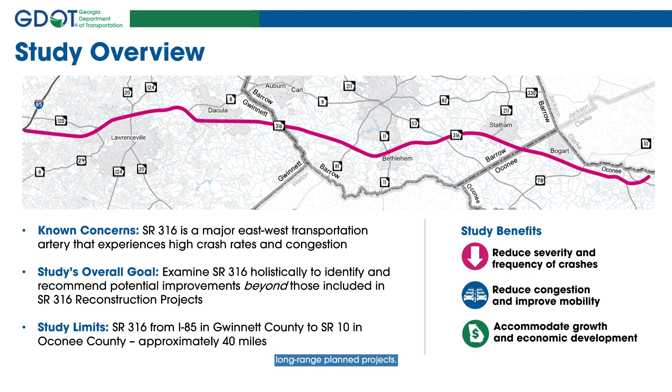The purpose of the State Route 316 planning study is not to duplicate the efforts of the reconstruction projects. Rather, the study is focusing on additional improvement needs along the corridor, with a particular focus on intermediate and long-range planned projects. The study began in mid-2022, and it is expected to conclude in the fall of 2024, although this schedule is subject to change.

As part of the study, GDOT is conducting an origin destination, or OD, analysis, analyzing existing and future traffic growth and land use data, and evaluating alternatives and providing recommendations. These recommendations will be detailed in the study's final report.

GDOT conducted its first phase of stakeholder and public outreach in the spring and summer of 2023. For stakeholders, GDOT conducted 4 virtual meetings with city, county, and business leaders, and 1 in-person meeting with a cross-section of community members. All told, we hosted more than 4 dozen stakeholders. For the general public, we conducted 3 in-person meetings in Gwinnett, Barrow, and Oconee counties. A total of 259 residents and 8 elected officials attended these meetings.

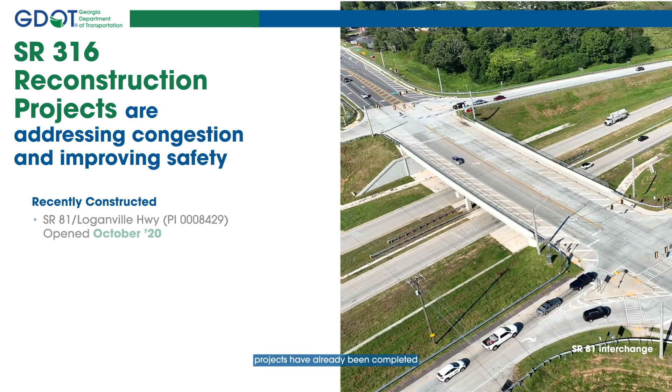As previously noted, the State Route 316 planning study is separate from, but concurrent with, a series of State Route 316 reconstruction projects. As this slide shows, several of these reconstruction projects have already been completed, at State Route 81 Loganville Highway, Harbins Road, and State Route 53 Hog Mountain Road. These projects are already easing congestion and improving safety along the corridor.

As an example, at the recently constructed State Route 81 Loganville Highway interchange, the speed during the PM or late afternoon hour has increased from 45 miles per hour in 2018 to 52 miles per hour in 2021. That means the overall flow of traffic has improved at this new interchange along State Route 316. In addition, we've seen a reduction in annual crashes from 106 in 2018 to 55 in 2021.

As this slide also shows, we have a project under construction at State Route 11, Christmas Avenue, near the town of Bethlehem, and we expect to see similar improvements once completed.

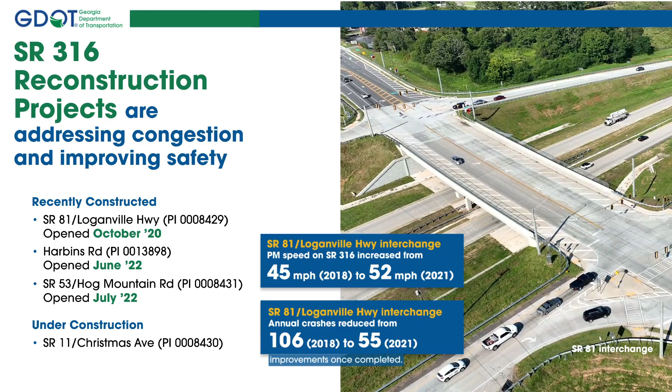As mentioned, the State Route 316 reconstruction projects aim to transform the corridor into more of a free-flow facility. Think of a free-flowing highway versus a roadway with traffic lights. $858 million is currently being invested within the corridor, a price tag that reflects a strong commitment to improve safety and mobility along State Route 316.

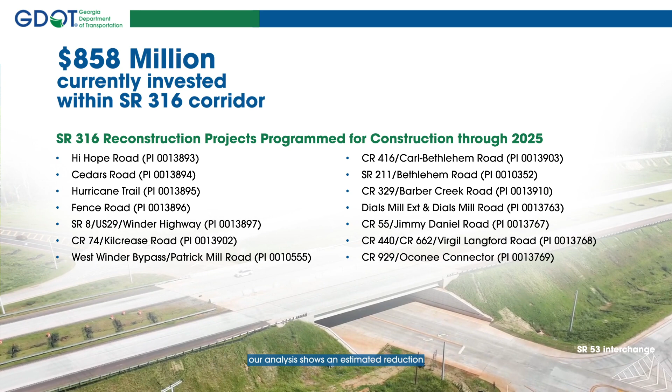Shown on your screen are the reconstruction projects that are programmed for construction through 2025. The word programmed means that the projects are funded and will start by that date. Once the reconstruction projects are completed, our analysis shows an estimated reduction of 212 crashes annually, or 11% in 2050.

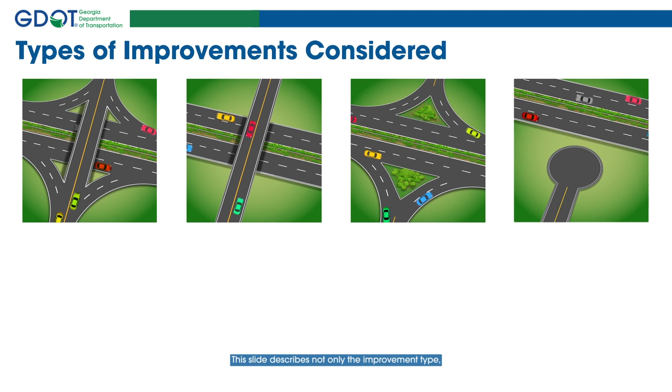Along the entire corridor, the study is considering 4 types of improvements along State Route 316 for the remaining at-grade access points. We shared these types of improvements with stakeholders and the public when we met in 2023. This slide describes not only the improvement type, but also the rationale for selecting an improvement type at a particular at-grade access point. Interchanges, for instance, should be considered in areas in which we see high traffic arterials and major development at a location.

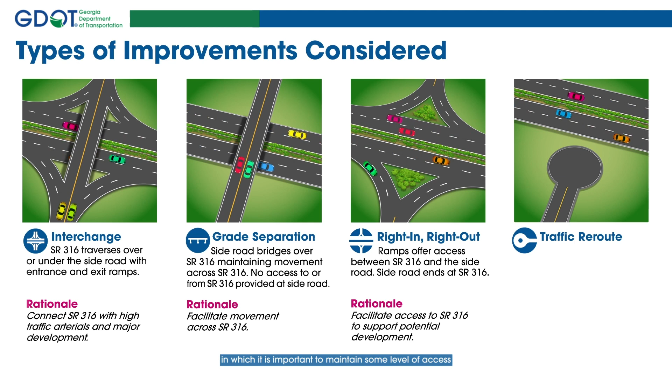Grade separations are appropriate in areas in which it is important to facilitate movement across State Route 316. Right in, right out access should be considered in areas in which it is important to maintain some level of access to and from State Route 316. For instance, access would be important to support potential economic development next to State Route 316.

Finally, traffic reroutes protect residential neighborhoods and low traffic rural areas from high-speed traffic on State Route 316. As State Route 316 transforms more into a free-flow facility, having uncontrolled intersections along State Route 316 to low-volume residential neighborhoods can create potentially unsafe conditions. Traffic reroutes will provide access to State Route 316 at other locations. Additional local road improvements may be necessary to facilitate a traffic reroute.

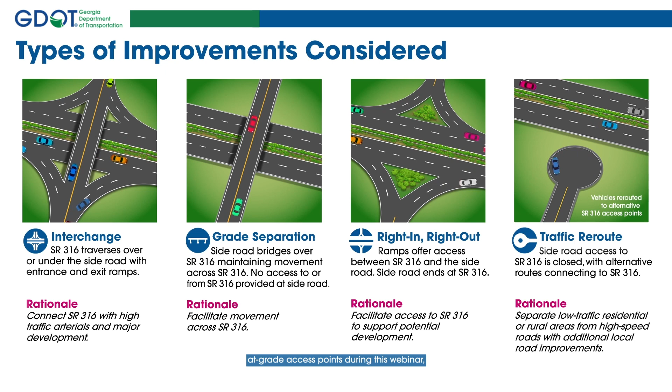Each type of improvement has trade-offs, including accessibility, property impacts, safety, and cost. As we share our potential findings for each of the remaining at-grade access points during this webinar, keep these trade-offs in mind. The current State Route 316 reconstruction projects address most of the existing high-traffic, high-congestion crossings.

In general, the remaining at-grade access points have lower traffic and connect more rural roads and residential neighborhoods. We believe the focus of these remaining crossings should be to complete the transition of State Route 316 into more of a free-flow facility. We should eliminate unsafe left turn movements to and from State Route 316 while maintaining some level of access to or across State Route 316 in areas in which future development is planned.

The rationales we discussed on the previous slide informed our selection of the recommended improvement types. Addressing the remaining at-grade access points is important. In addition, improvements to the arterials that cross and connect to State Route 316 are also important based on the study's analysis, as well as the feedback we received from stakeholders and the public.

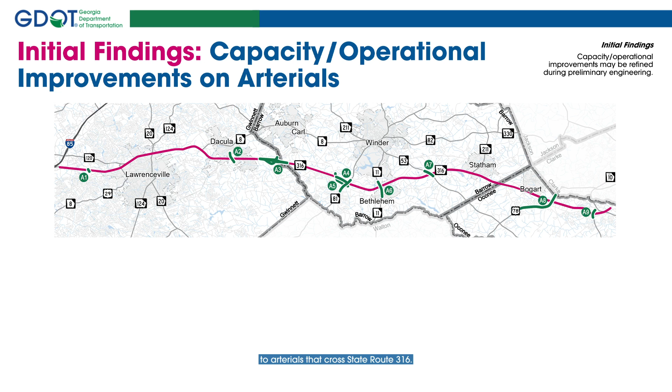Beyond addressing the remaining at-grade access points on State Route 316, the study's analysis, combined with stakeholder and public feedback, shows that additional improvements are needed to arterials that cross State Route 316. We have identified 9 potential improvements that would add capacity and improve traffic operations on several arterials. The improvements consist of road widening, intersection improvements, and one additional interchange at State Route 316.

The additional interchange is proposed at the Rowen development site. This interchange is in addition to the interchange at Williams Farm Drive. The second interchange at Rowen is dependent on the site reaching full build-out.

These projects were identified by pinpointing crossing arterials and intersections operating at level of service F even after implementing the access point improvements. Level of service, or LOS, measures traffic and operational conditions of a roadway and is designated with a letter from A to F. Level of service A represents the best conditions, and F represents the worst. The proposed projects would improve the level of service at these locations.

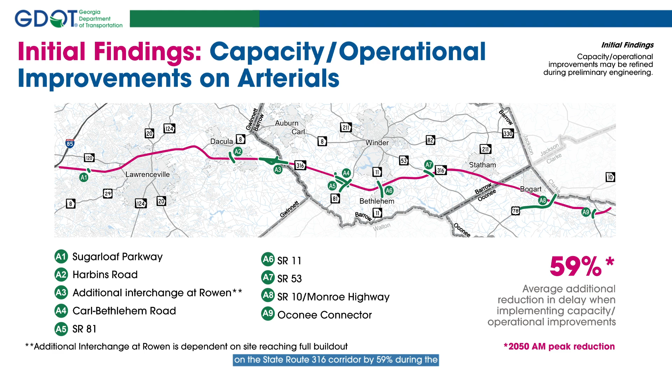Based on our traffic models, we estimate that implementing these improvements would reduce traffic delay on the State Route 316 corridor by 59% during the AM peak period in year 2050.